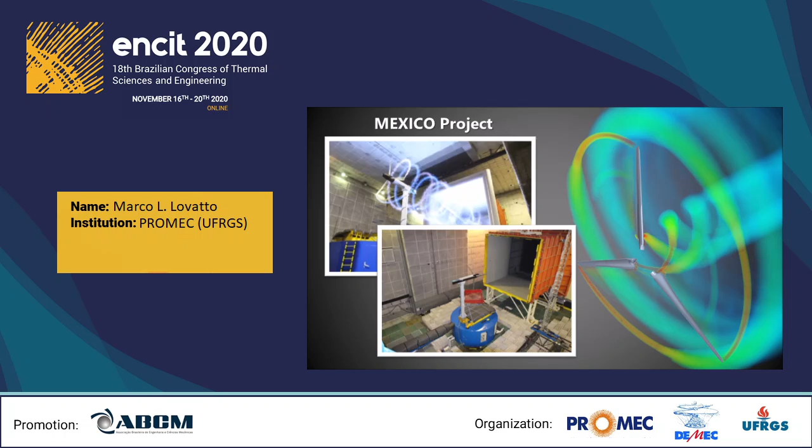But what about the large multi-megawatt horizontal axis wind turbines? Well, currently there is no experimental data available, mainly because its acquisition under controlled conditions is impractical. Indeed, in the author's personal opinion, the real flow phenomena occurring in huge wind turbines are currently much closer to being fully understood by the application of CFD than by experimental campaigns. Our research is therefore a contribution to the quest for CFD strategies better fitted to correctly capture the complex flow phenomena intrinsic to large horizontal axis wind turbines.

The CFD modeling evaluated in our research has three main characteristics. First, it solves a compressible flow in order to address the Mach numbers greater than 0.3 that happen near the blade tip of the Mexico rotor. Second, it uses a turbulence model that is tailored for the intrinsic anisotropic features of turbomachinery flow. Third, it is mesh converged according to the Grid Convergence Index study proposed by Celik.

As for our outputs, besides delivering blade pressure loads that are comparable to the New Mexico experiments, and also to other CFD studies on the same case, this research delivers information that we did not find in the literature around the Mexico campaigns, which is the blade thrust and torque obtained by continuous integration using the CFD mesh resolution, and including skin friction. Indeed, forces on the blade, including the wall shear stress, may not be very practical to be gathered experimentally for the rotating blades.

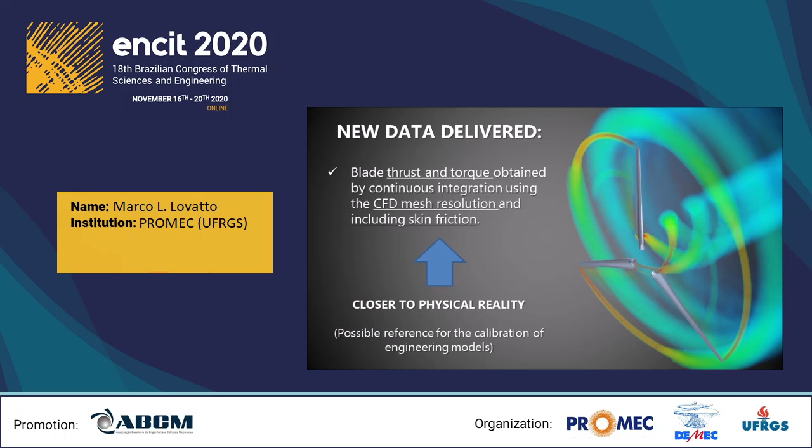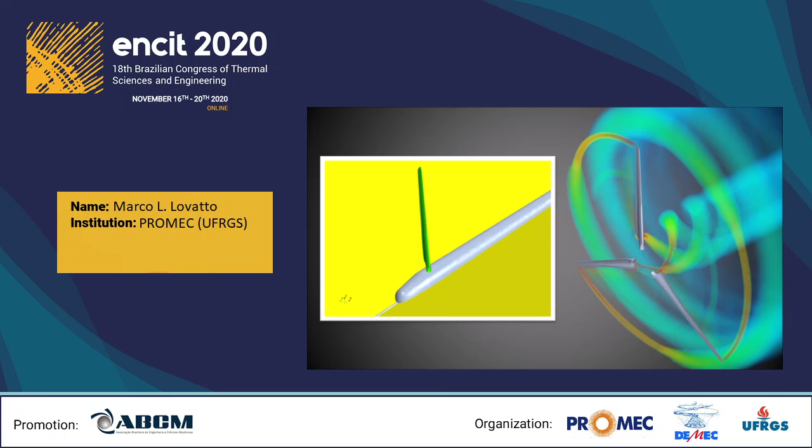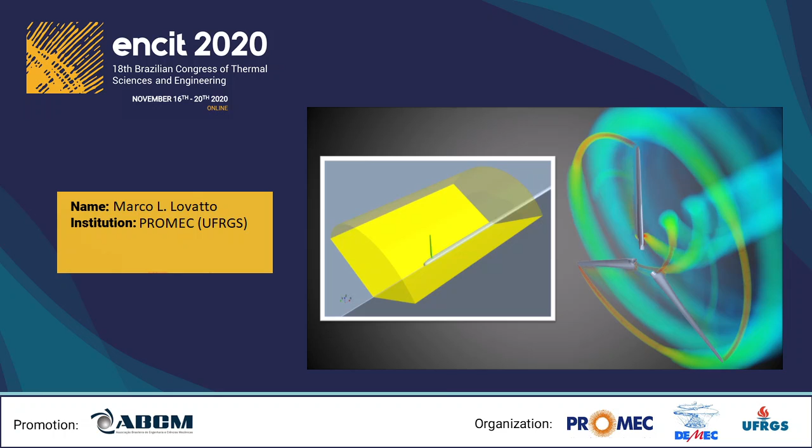Now I'd like to show you how we set up the blade geometry and the computational domain for this simulation. The Mexico rotor is a three-bladed rotor, and the virtual geometry of a single blade was placed inside a 120-degree periodic computational domain. This periodic computational domain is composed of a rotating region, in yellow, which is surrounded by a static region, colored in gray. The free stream airflow enters at the dark red surface here and exits the domain at the brown surface.

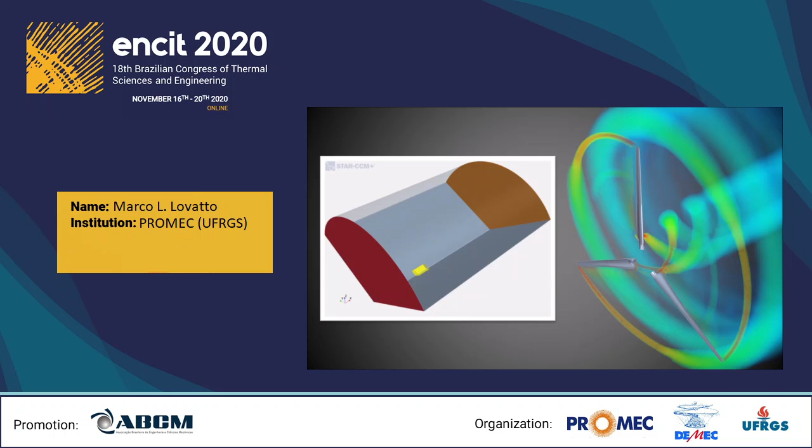Regarding the physics setup, the airflow was modeled by fully turbulent, compressible, and steady-state Reynolds-averaged Navier-Stokes. Density was modeled as ideal gas, and for dynamic viscosity and thermal conductivity, Sutherland's law was used. Regarding the turbulence model, we used the elliptic blending Reynolds stress model. A literature review suggests that this is the first work to assess this turbulence model on a wind turbine type rotor with a mildly compressible flow region on the blade tip.

Reynolds stress models are already known to be capable of resolving the anisotropies of rotating systems, but this newer RSM, called Elliptic Blending RSM, has an extra layer of fidelity: its low Reynolds modeling capabilities, making this RSM appropriate for modeling flow separation and reattachment, which is very important for turbomachinery.

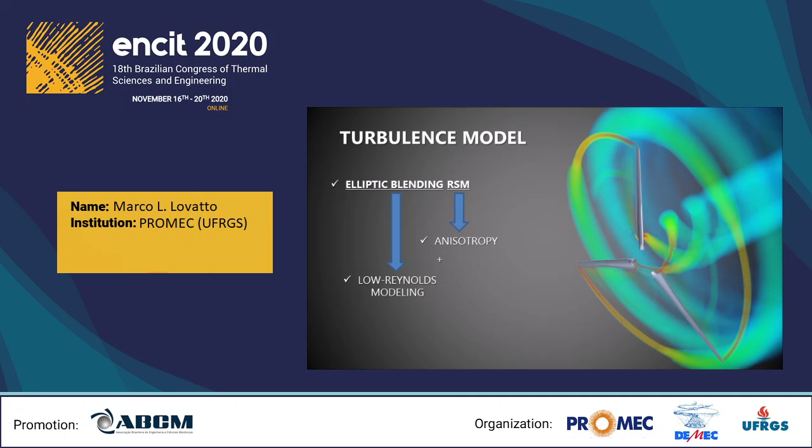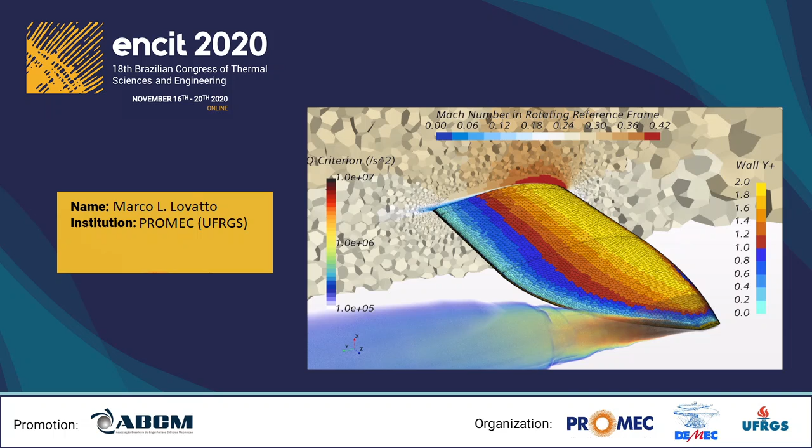This figure depicts the suction side of the blade tip. Here we can see three data. First, a mesh slice at 92% of the rotor radius, which is colored by the Mach number, where Mach numbers as high as 0.4 are attained. Second, the mesh on the blade tip surface, colored by the wall Y+, which is kept below 2 everywhere. And third, the Q criterion rendered on the volume to identify the blade tip vortex.

Well, the majority of the CFD studies found in the literature on wind turbine rotors do not model a compressible flow, but employ the incompressible formulation instead. Even though compressibility seems not to play a crucial role in the overall static blade loads, some studies do suggest that it should not be ignored when some particular aspects are of interest, namely the blade tip vortices, aeroelasticity, and aeroacoustics.

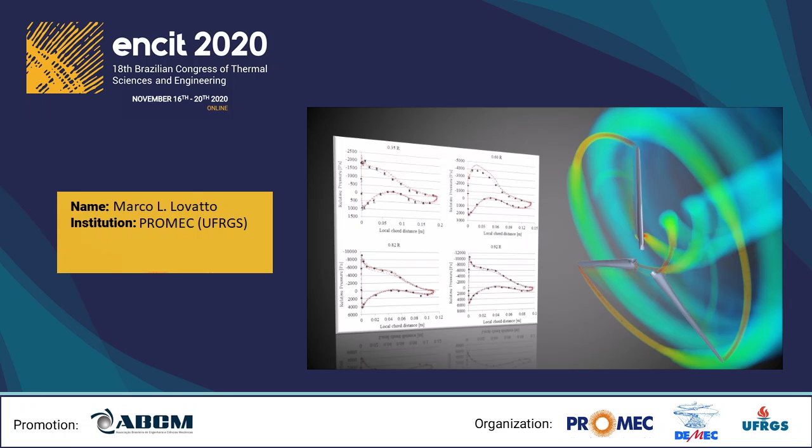In the paper, we invite you to take a closer look at how our results compare to the experimental data and to other CFD data at 5 different sections of the blade. But here, in this presentation, we'd like to focus only on the integral loads. Here on the left, you can see the torque values for one single blade, and on the right, the thrust values. In gray, we have the experimental values. In green, the averages from the CFD literature. And in red tones, the values from our research.

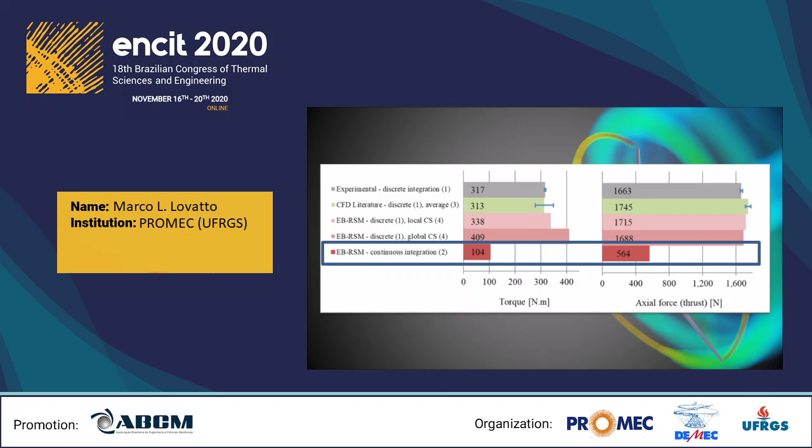As you can see, our results are similar to the experimental and to other CFD data when integrating only the 5 discrete sectional loads and excluding skin friction. But we also deliver here our results considering the complete blade surface, using the mesh resolution and including the wall shear stress.

As a conclusion, our research not only proved the ability of elliptic blending RSM to deliver blade pressure loads comparable to the experiments and to other CFD studies on the same case, but also delivered integral blade loads data that may be valuable for the low-fidelity modeling scientific community. The complete dataset of the simulations we performed is downloadable from a link that is provided in the paper.